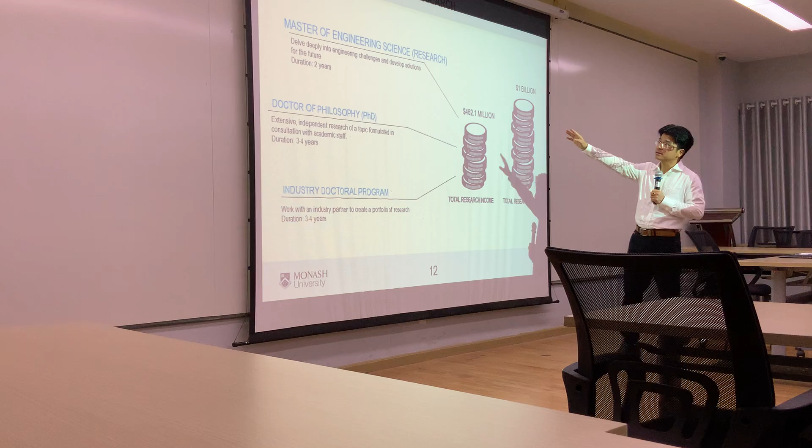As a bachelor student, you can have the opportunity to do research. The research program is 2 years, and the PhD program is 3 to 4 years. So if you are a bachelor graduate and your accumulated GPA is above 80%, you can enroll directly into the PhD program - you don't need to study a master's first. So those students who come into my lab with gold medals study Doctor of Philosophy directly, and after 3 years they get their PhD degree.

There's also the industry PhD program, where you study for the PhD degree while at the same time receiving payment from industry. You work with industry, collaborate with them to solve their problems, and then enroll at Monash - you study at Monash while also getting paid. Think about that - the salary is very high, 100,000 per year. And after 3 to 4 years, you get the PhD degree at Monash.

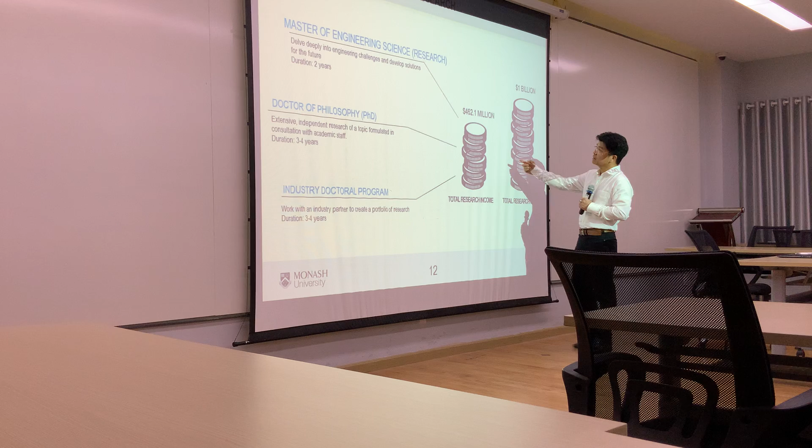And this is something quite important. Now, to some of you it may not be important, but to us it's important because it shows how much money we invest in research and how much money we invest in teaching. This is very important because a university with less money or funding invested in research will not be able to show their strength. So this is the total income we take from university students.

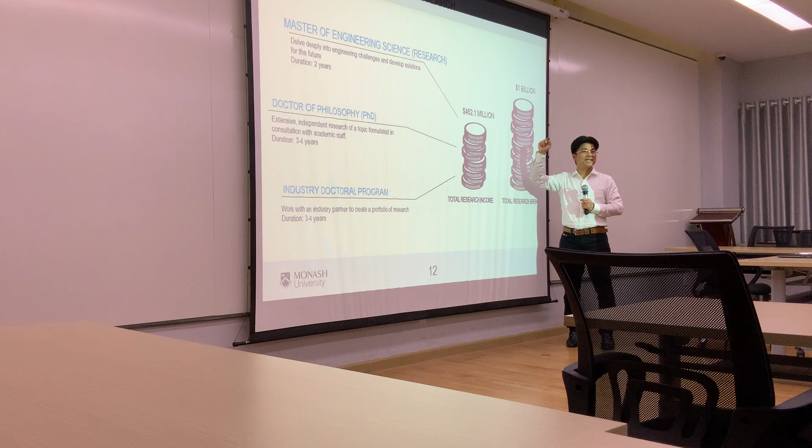Both local and international students - but this is the income we spend. So where does the rest of the money come from? This is income from teaching, this is income from research. What do you think about the rest?

Otherwise, we're going to bankrupt very soon, right? So we spend almost double the amount we receive.

This is the research fund. We, as researchers, as professors, actually secure funding from government and industry. For example, I have a project worth multi-millions of dollars, and that project helps me run my research, and helps me buy equipment to do research. This is a huge amount, and the largest spend across universities in Australia.

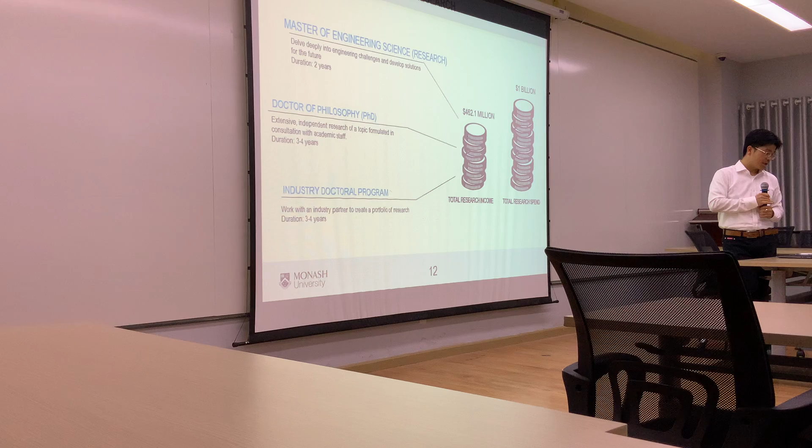Across civil engineering, we have only 3 future fellows, and I'm one of them. This is a very prestigious title given by the Australian government to outstanding researchers to conduct intensive research within 5 years. Within those 5 years, I don't need to do any teaching - I only do research. See how good it is, being a professor who doesn't need to teach, just do research.

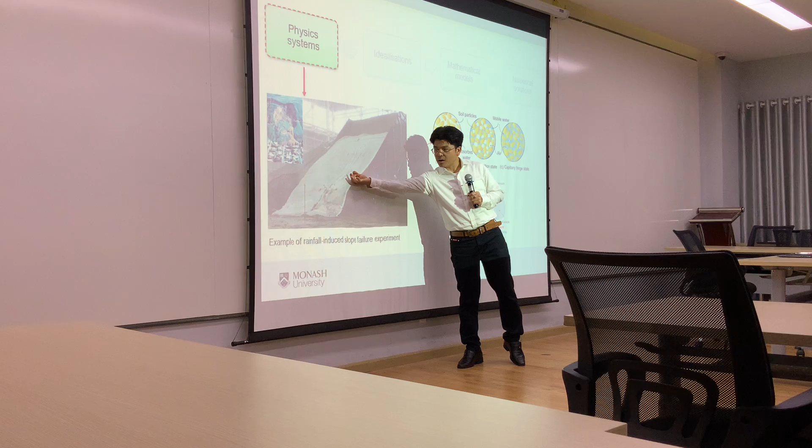When you look at the physical system and zoom in on a small element, you see the system you're looking at - starting from the system with a little water and air. This is the most stable system because the difference between pore air and pore water pressure produces a very strong connection force. When rainwater diffuses into the soil body, these pores gradually fill with water, eventually becoming fully saturated, and the soil loses its strength and eventually collapses.

This is a process, a physical process. By looking at the system, I understand the process. Now the next question would be, how do I model this problem?

The next step is I need to go to some sort of idealization. This is the system I understand from the test, and then I'm moving on to the idealization here. You can see this system has three phases: air phase, water phase, and solid phase. They distribute randomly in this volume, let's say V.

So idealization means I separated them. I take a solid volume, I take the air volume, I take the water volume, I separated them, and now it becomes one material, homogeneous. I develop the model for each of these phases, because when it becomes one material, homogeneous, I can easily model it.

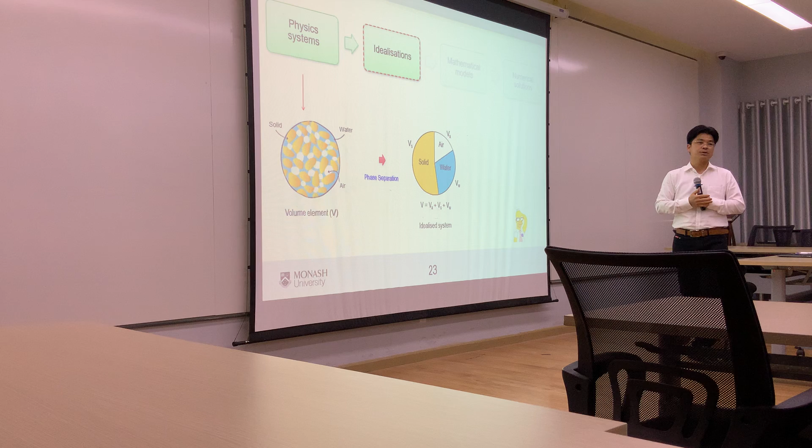So I develop a mathematical model for one material, for water, for solid, for air, but then I lost the interaction. So I need to find a way to describe interaction between them - how the water interacts with the air, how the air interacts with the soil. That is the physical law I'm going to impose. But the good thing is, after I separated this, I can actually develop the mathematical model.

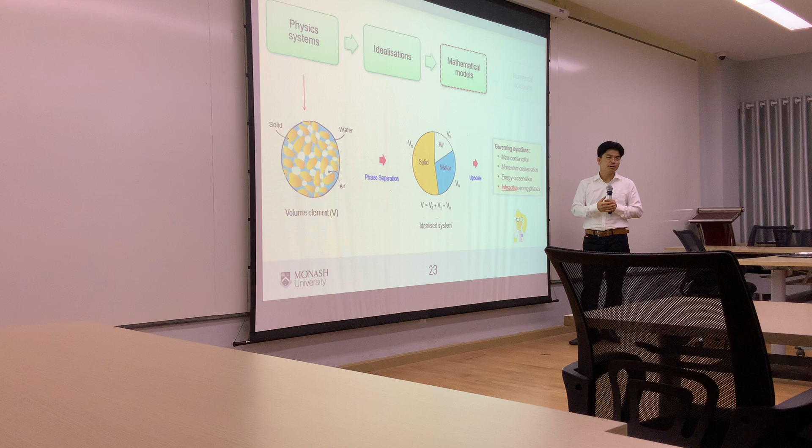And interaction - I have the equation in place, but then I get interaction among all of this. After assuming I have the governing equation, the next step will be, alright, now I have the model, I can solve it. I have the governing equation, I can solve the problem.

So when we're talking about this governing equation here, what does that mean? I'm going to explore a little bit here so that you can understand. Because just talking about mass conservation, momentum conservation, energy conservation probably has no meaning - but what does it mean by that? I'm going to give you a little bit on this.

So if you want to look at governing equations, you might ask, okay, what theory do I need to study? When you're working in the computational geomechanics area, pretty much continuum theory is the theory you require. Have you studied fluid mechanics? You guys study fluid mechanics, right? Fluid mechanics is continuum theory - you describe the fluid behavior.

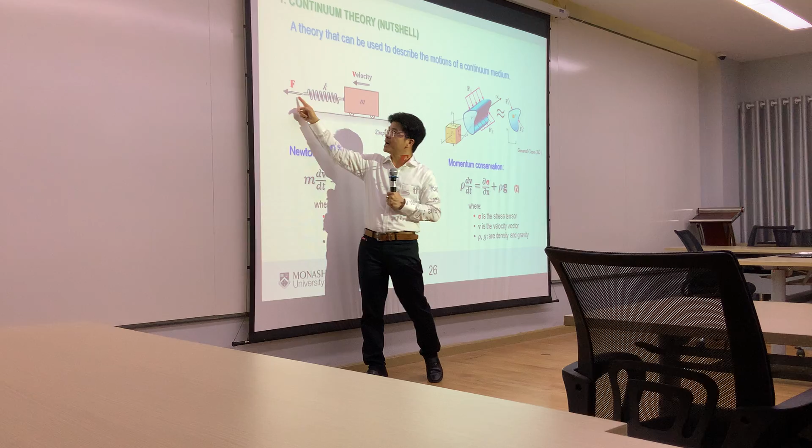I'll start from the left-hand side. Consider a car placed on a horizontal surface, and this car is connected to a spring, pulled by a force F. Think about the motion of this car - if I want to describe its motion, I have to use Newton's second law. All of you know this, right? Definitely. Newton's second law tells you what? I know the mass - this is what?

Acceleration, that's correct. This is the force, applied force. This is the body force, mass times gravity. This equation you understand, right? Unfortunately, this problem is only 1D, because you only have one force component, right?

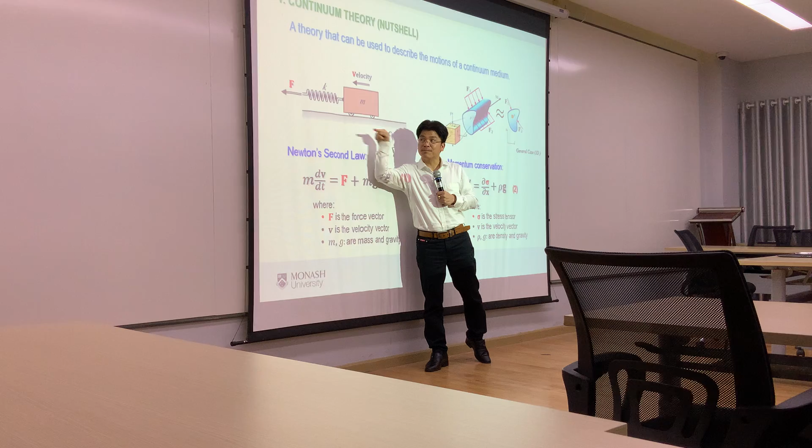Now think about this. Let's say you have a cubic element of solid, and you apply a force, you apply the load on this element. You cannot use that force because I can apply here, I can apply here, I can apply there, or even I can apply in this direction.

So in total, I can have 9 different forces applied to this guy. So that force is scalar in one direction, but this one has 9 components, so I have to use something else - that's what I call the stress tensor. This stress tensor represents all of the force acting on this guy. Does that make sense? Okay?

And the rest will be the same. Looking at this guy, looking at this equation, looking at that equation, I'll show you how the continuum theory is developed. On the left hand side, the mass - I'm going to consider a unit volume, so that mass is equivalent to the density. So this is mass, basically, for one unit volume. Mass times acceleration - I still have acceleration, right?

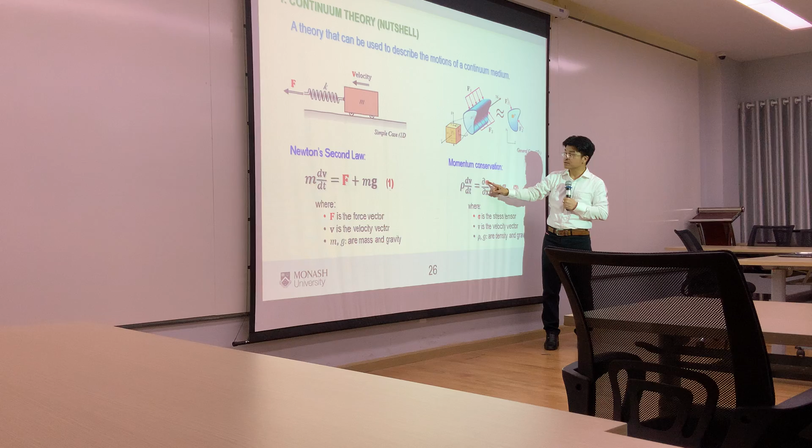This is the force, that force. And because at one time, this guy is actually carrying so many forces, I need to use this one to describe force: the rate of change of the stress with space. And that one is the same - you see the similar thing.

This is the one you see very frequently in continuum mechanics, or even in fluid mechanics. In fluid mechanics, this one is composed of pressure and shear stress. That is the equation - we call this the momentum conservation equation. And you can see the momentum conservation equation and Newton's law, they are the same. Does that make sense? You understand here? You see the two equations are exactly the same.

But what's the problem here? If you look at the equation, what is the problem? Can you solve the equation? Can you solve that equation? Why can't you solve the equation? Say it, come on. Why? It's okay to be wrong. Why can't you solve the equation? Can you solve it analytically? That is the correct answer.

Correct - too many interactions. Assume I know a direction - if you look at the equation, why can't you solve it analytically? Because you have this guy, this is the spatial derivative. You don't have an analytical solution for it. Spatial derivative, right? You have to use a numerical method to approximate it, okay?

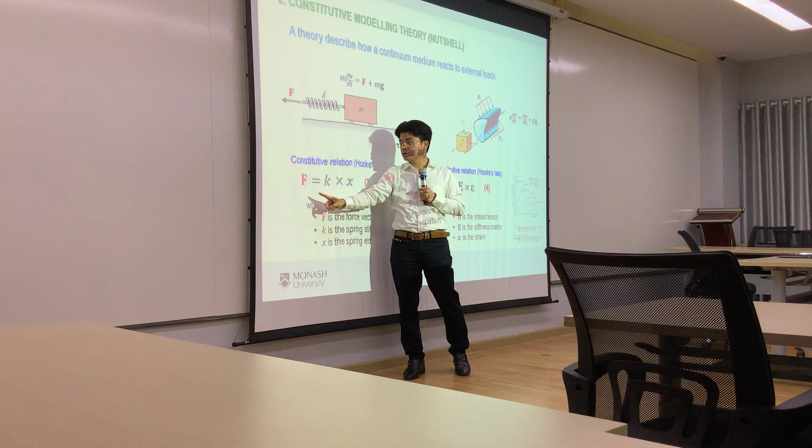Think about a spring. If you have a spring, this is the force - force equal to K times X. This is Hooke's law, and you all know about this, right? This F equal to Kx is actually the second component that I call the constitutive theory. And similarly, here I also have Hooke's law for the stress tensor - sigma equal to E times epsilon. So this is the second component I need.

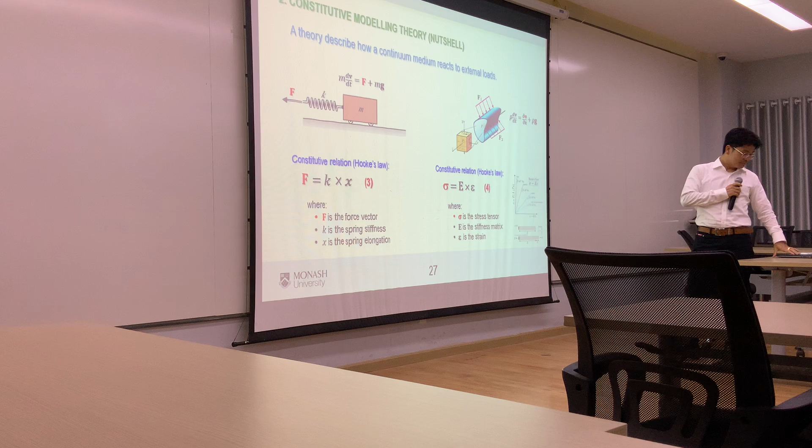Okay, and then finally I have the third component - this is the numerical methods that I require. Sorry, John, I'm not running out of time - probably 10 more minutes. Yeah, we're going to ask some questions.

All right, now we have a governing equation established, continuum theory. We have a constitutive model established. Now we need to solve the equation, right? How do we solve the equation? That's why we need numerical methods.

So you look at the equation. If you want to solve it, you need to find a way to approximate the spatial derivative, and that's where we need numerical methods. The key idea is to convert this partial differential equation into an ordinary differential equation. For example, the spatial derivative of stress can be approximated by an equation.

This is a finite difference method. Have you learned this in your course? You have learned that, right? That's good. So this is the simplest way to do it.

So what does it mean by numerical methods? I have three components: continuum theory, constitutive modeling theory, and numerical methods, which together form the basic concepts of computational geomechanics.

So when I'm talking about numerical methods here, I'm taking this example of finite difference methods. But in reality we have many different numerical methods. These are several examples you can see.

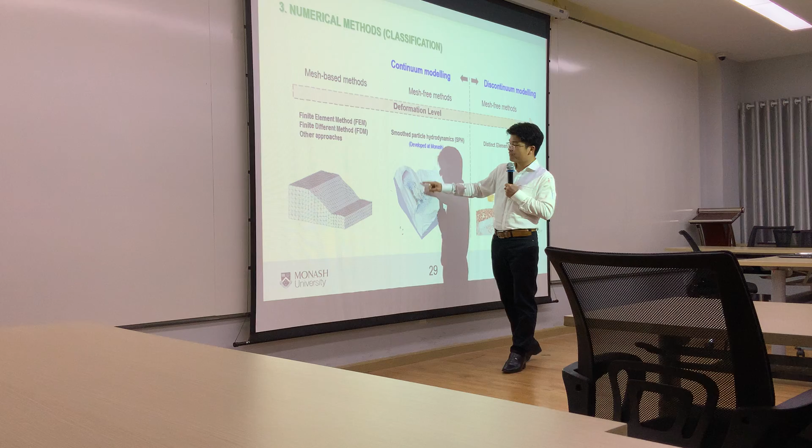And this is mesh-free - we don't have the mesh. This is mesh-free methods. And finally we have another discrete numerical method. These are some of the numerical methods we extensively use in computational geomechanics. So this covers all the basic concepts: continuum theory, constitutive model, and numerical methods.

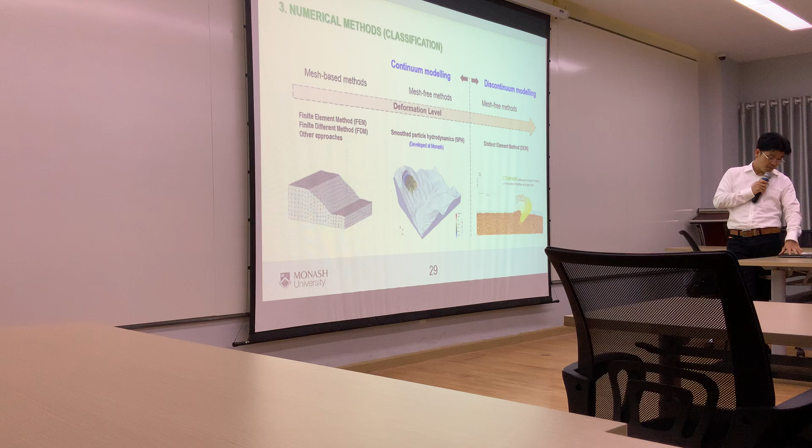So then why do we need to use it? I'll quickly show you a couple of examples of why we need computational geomechanics. The first starting point of using computational geomechanics is for design.

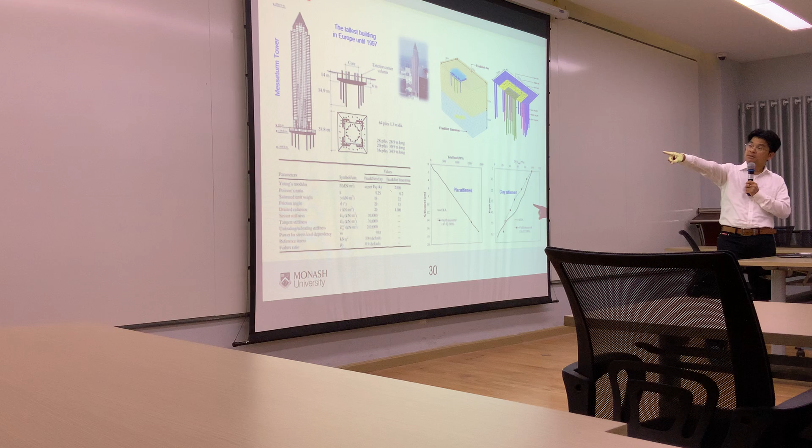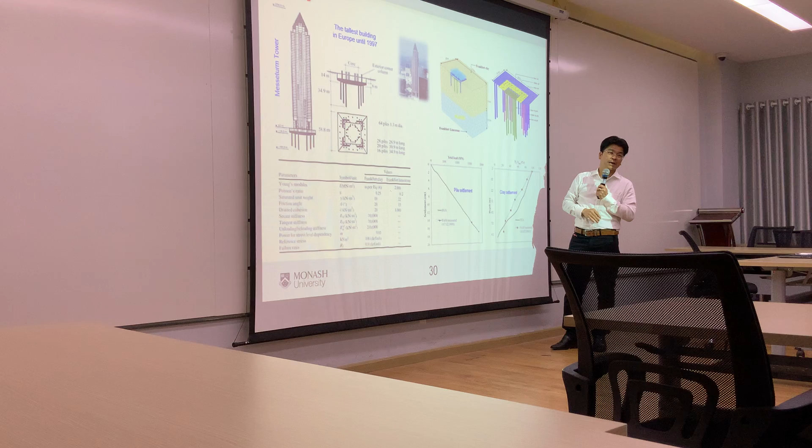So we can use the theory I just explained to design, for example, this kind of foundation system to carry the load. We can predict how much the soil deforms under the mega load, and also look at the surrounding soil as an example. So this is an example of what we can do.

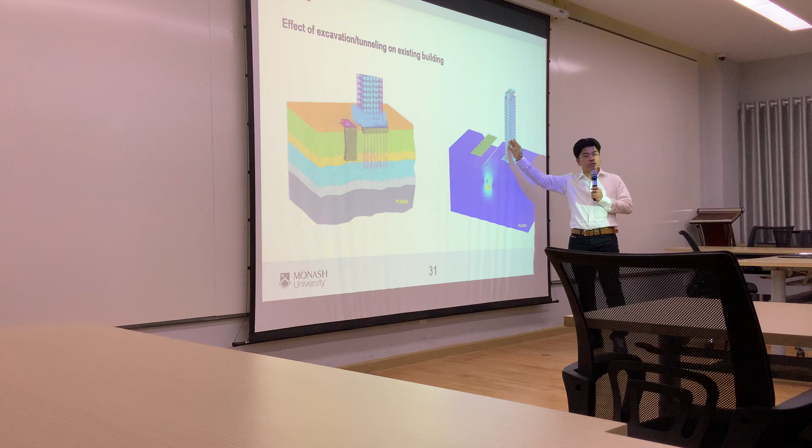Here's another example with the development of urbanization. You can see that in many cases you have to excavate the soil, especially when excavating or tunneling in a city. In many cases you have to do this sort of construction activity near high-rise buildings, and it could actually affect existing buildings. So we need to use these numerical methods to predict whether it's safe to do this sort of construction activity. This is another application.

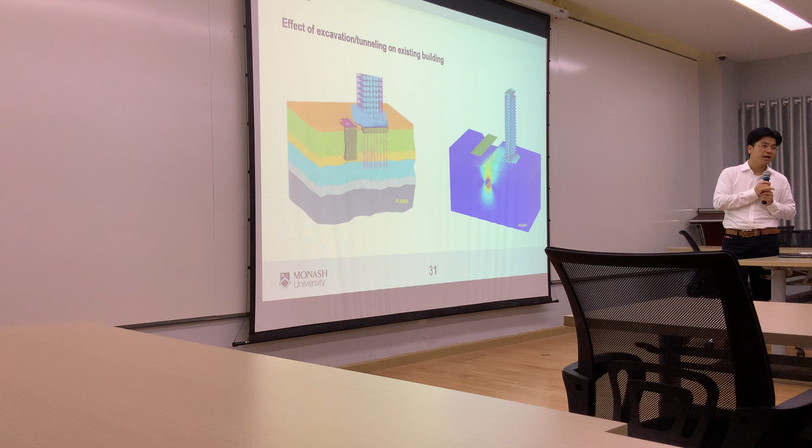Another interesting application is designing mechanical structures. This is a project I did back when I was in Japan. If you look around, you can see an example of the structure, the mechanical work - this is the soil, this is also the mechanical structure. When you cut the slope, you need something to reinforce it to keep it stable, and we use this sort of mechanical work to support the slope.

Depending on the size of the slope, in this case the total height will be up to 20 meters, and this block is actually around 1.5 meters or even more - a very large block size. So if you want to design this, you probably have to do experiments and tests to optimize the shape, and it's very expensive to do this sort of thing in the field.

So we can develop something using computational geomechanics, something like what I have here. This is an example of a computational model we developed, with different scenarios - this is the soil, this is the block, with different slope angles. Then we can test it on a computer. For example, if you actually load up to a 45 degree angle, it can show certain information indicating it's not safe.

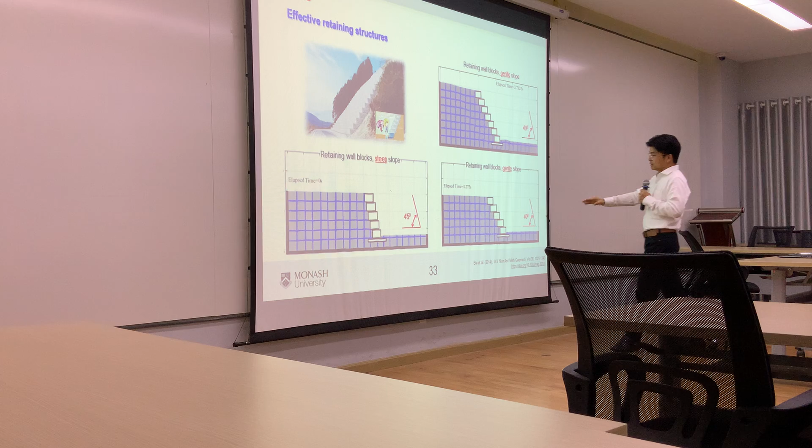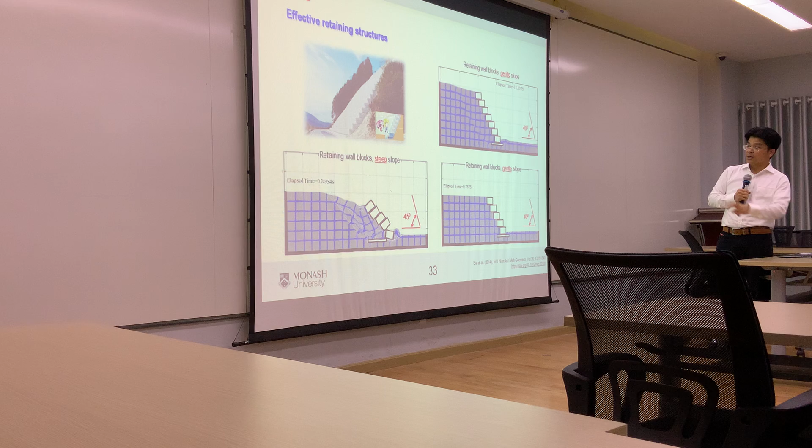So we can tell from the computer. Here's another example: if you reduce the number of blocks or reduce the height of the slope, it will stay stable. Or if you reduce the height but increase the slope angle, it might become unstable again. This we can tell from the model.

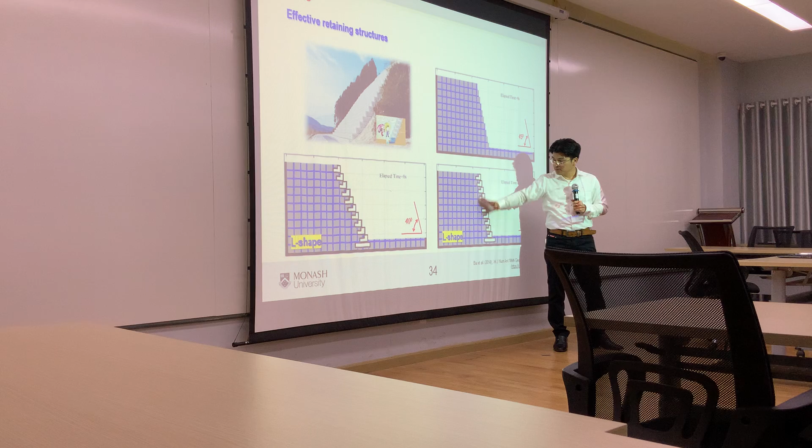We can also design different shapes, right? We can use the computational model to look at different shapes because you want to optimize the material, and at the same time reduce the weight of the retaining wall on the soil. You can change the shape.

So this is an example without this sort of support, the retaining wall collapses. When you design with 45 degrees, it collapses, right? But if you reduce to 40 degrees, it's stable.

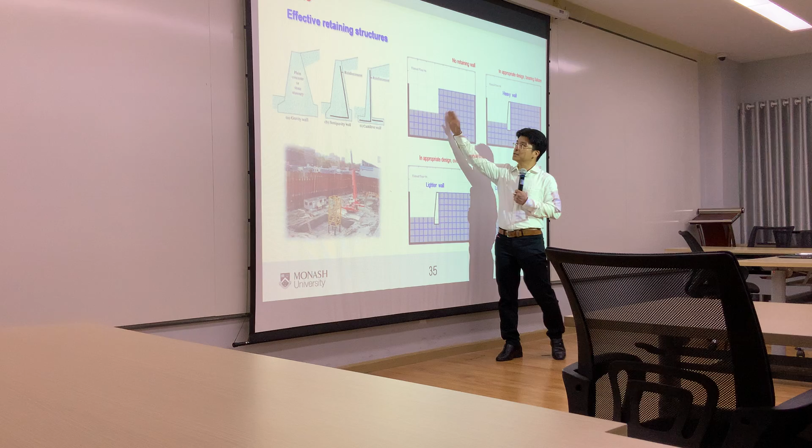So this is something we can play with once you have a computational model developed. Or you can even look at the mechanical system here. As you can see, this is the cut excavation process. You excavate the soil, and if you're using quite heavy machinery without appropriate design, or a lighter one, or maybe an appropriate one, let's see what happens. It's quite interesting.

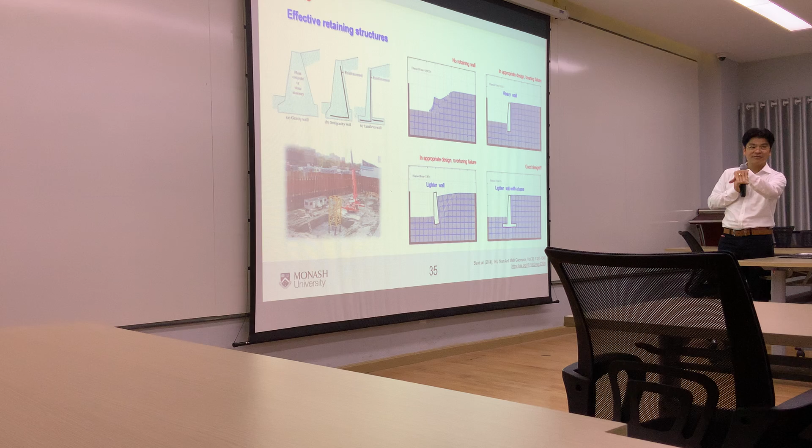Looking at the heavy one without any support, you actually get what's called a bearing failure. Then with a lighter one, you get what's called overturning failure. This we can describe. But if you design properly, like this, then it will be safe.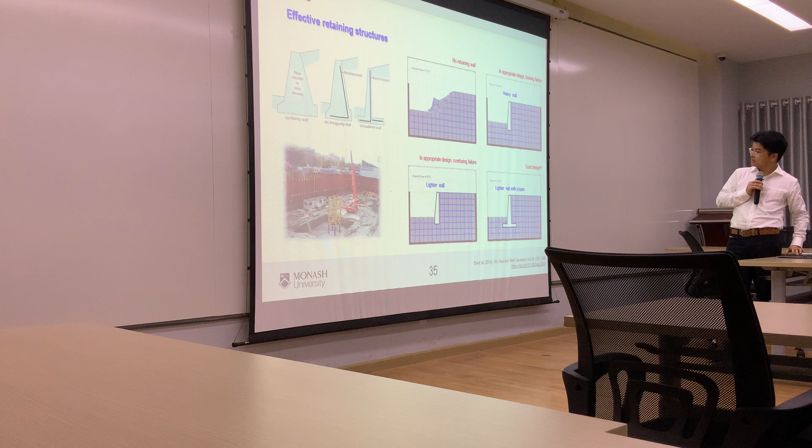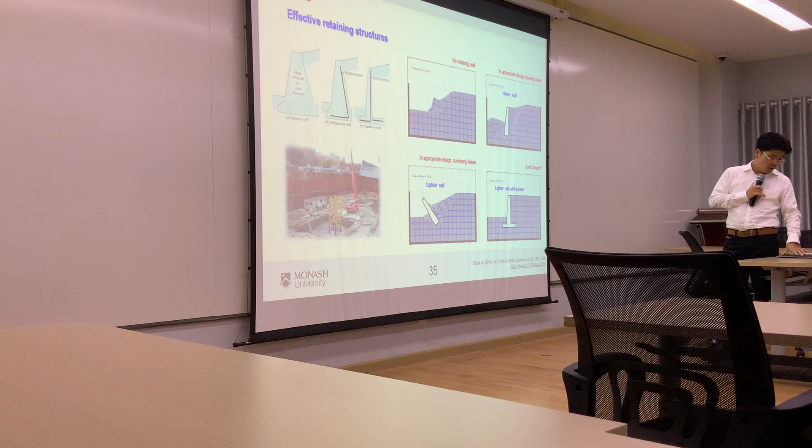Yeah, so that one is quite stable with the proper design. We can play with this, using the computational model to develop all of this. Or we can go further with some sort of design. This is a very complicated problem.

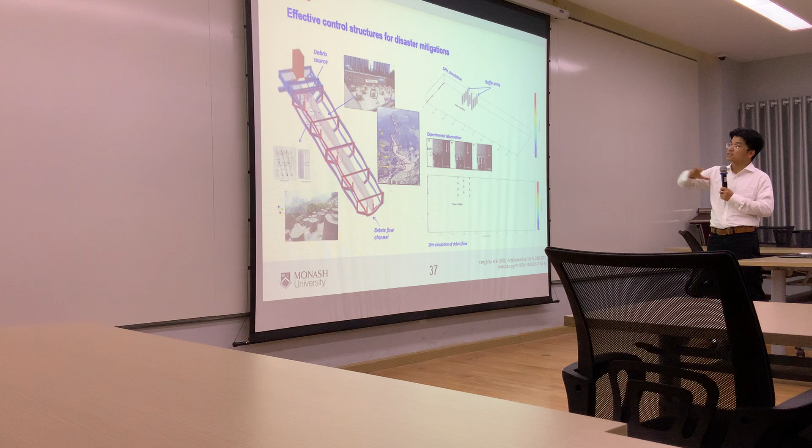You can use either a check dam or a baffle system, with columns of concrete installed down the track. This is an example of systems installed in Hong Kong that we worked on. So we can develop a computational model again to test and optimize the system. Here's an example of how the computational model can predict the flow through the baffle system.

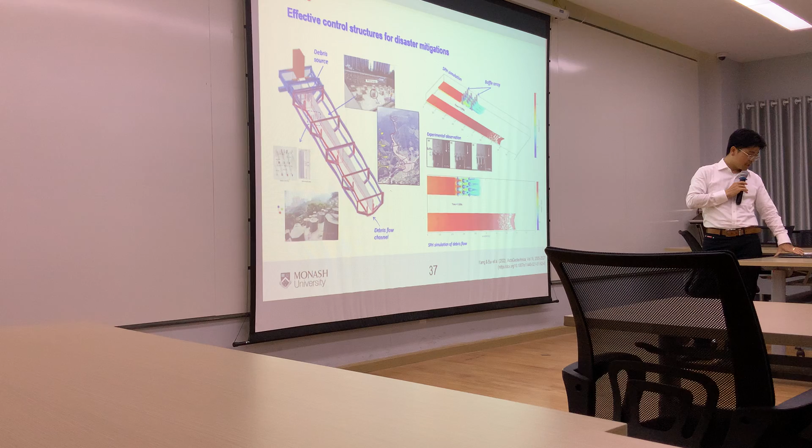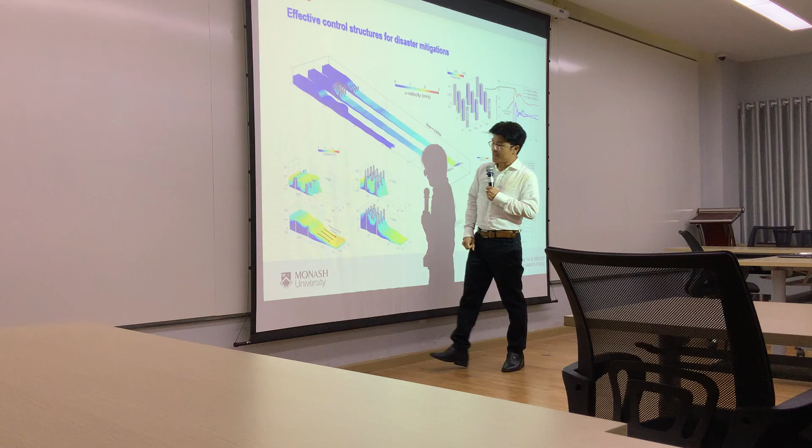You can see that, or even look at this: if I don't want to use the baffle system, I can use the check dam system instead—check dam, baffle, tall or short baffle. I can use the computational model to predict the maximum force acting on the baffle, so that I can design the reinforcement appropriately.

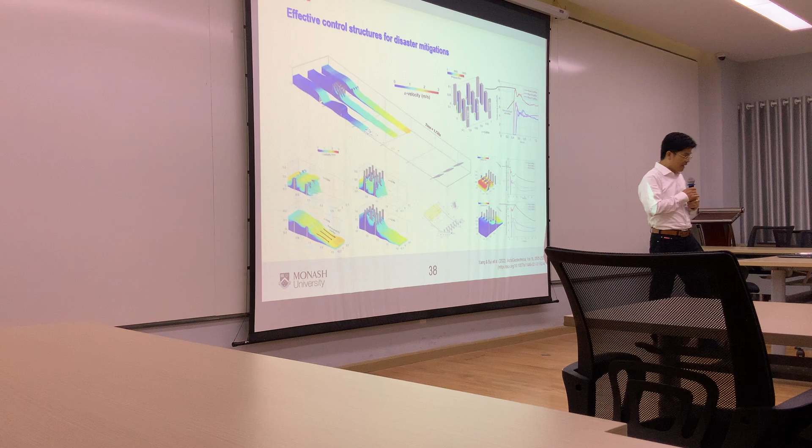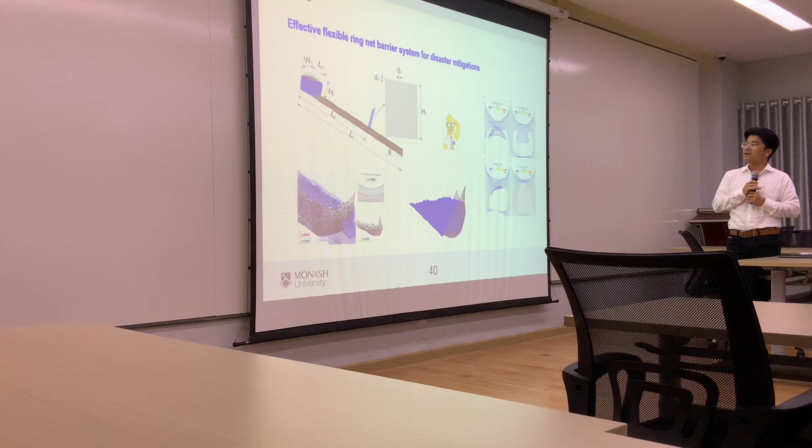I can also look at what happens with a tall or short baffle. I can even go further with a very complex system, like a multiple baffle system, using the computational model, or go with an even more complex problem here. I can use a ring net, a flexible ring net, and develop a computational model for it.

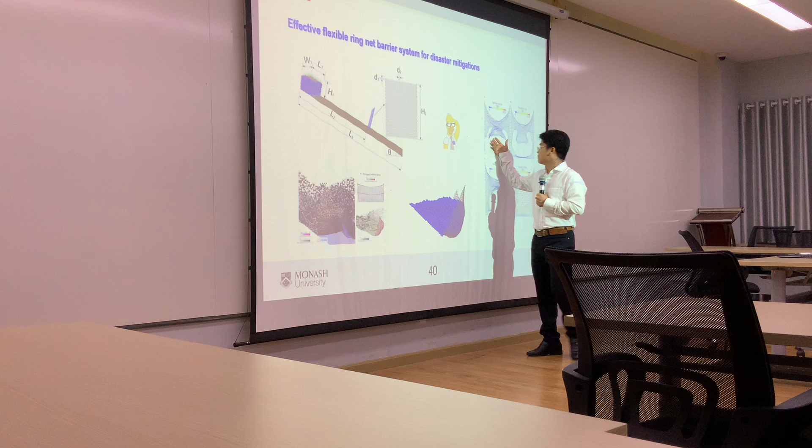This is a debris flow—I can model this entire process. I can predict when this flexible ring is going to break under the debris flow, or move to a real case scenario where I can take the entire information from the real world into the computer and analyze the problem.

This is an example of the modeling process we developed in our laboratory using our own software. We developed our own software to release this. This is the system we predict without any mitigation, and now if you install some sort of mitigation here, you can actually predict this sort of thing.

So these are a couple of examples showing how computational models can help design solutions to reduce disaster. Sorry for running out of time—with this, I would like to end my presentation. Any questions? Please feel free to ask me.

We spent a lot of time in the first part interacting about it. All right, any questions? All good? No questions? Not interested in computational mechanics?

Maybe give a prize—yeah, that's right. I already gave the prize. Now we still have two more prizes. What question? Who wants to ask a question? We have two more prizes. Come on, feel free to ask any question.